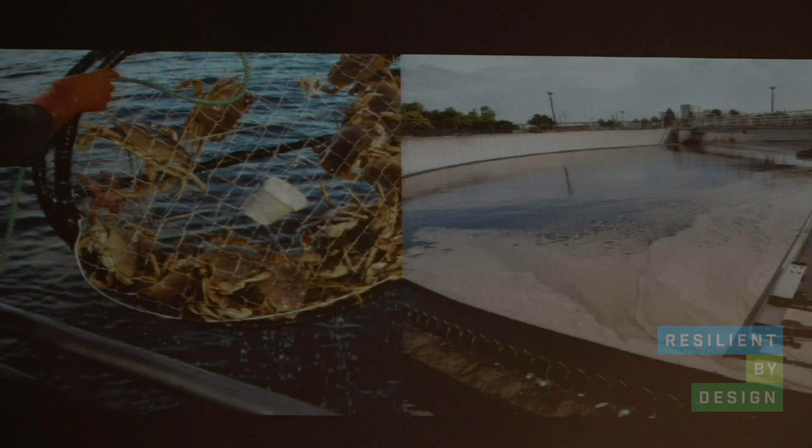The Baylands are incredible. They host our food sources. They treat our waste. They are these vast, almost incomprehensible places in terms of their scale, yet they hold these bundles of critical infrastructure at their shore: the ports, the dredge channels, the train lines, the highways. They also host species, threatened and endangered species, at different points in their life cycle. And while they appear passive, while they seem like these large passive expanses of green and brown and blue, they protect us and buffer and cushion the impacts of sea level rise and flooding.

Yet these Baylands, these resources, face slow and invisible risk. Henk is right, there is no immediate disaster that this region has encountered. The disaster is slow and will happen over time, but it will be disastrous if we do not act now. This is an urgent problem for people, in terms of the number of people, critical infrastructure including drinking water, transportation networks, energy networks that are at the Bayland interface, but it's also an issue for these ecosystems themselves.

This quote has been really inspirational for our work, from the Baylands Climate Change Report: that most of the marshes are projected to be damaged or destroyed by 2100 unless we intervene now. So while there is no major disaster, this is the major disaster, and the Baylands are the infrastructure that our team proposes that we invest in today.

This risk is joint ecological and human, and we have focused on these issues in our definition of this question. We've looked at this mosaic of ecosystems that really spans from the subtidal environs to mudflats to marshes, within this tidal range, the diked ponds, and then the vulnerable communities that exist at the edge.

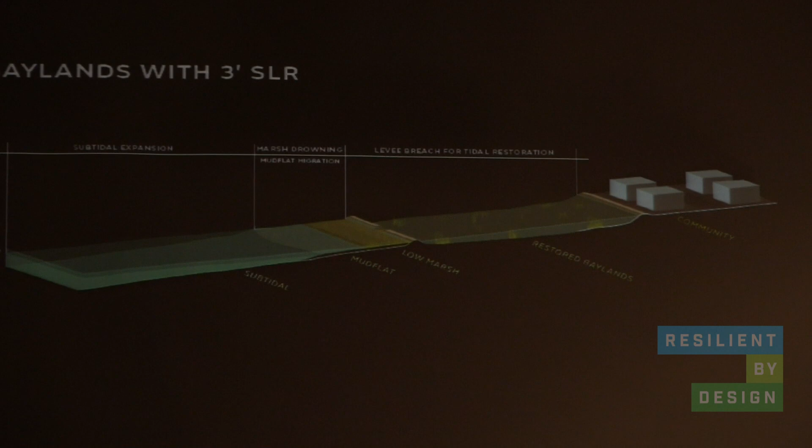The exciting thing about Baylands, the tidal Baylands, is that they have the ability to grow along with the threat of climate change if that happens at a slower rate. If we are faced with higher levels of sea level rise than we anticipate, and we have low sediment in the system, these ecosystems, these Baylands, will change over time. Mudflats will expand, marshes will shrink, and with higher rates of sea level rise, like 7 feet by 2100, these ecosystems will drown.

Vulnerable shoreline communities will be highly impacted. We will have deeper water at the shoreline, which will be damaging for populations along the edge and damaging for infrastructure along the edge, as well as large-scale ecological change.

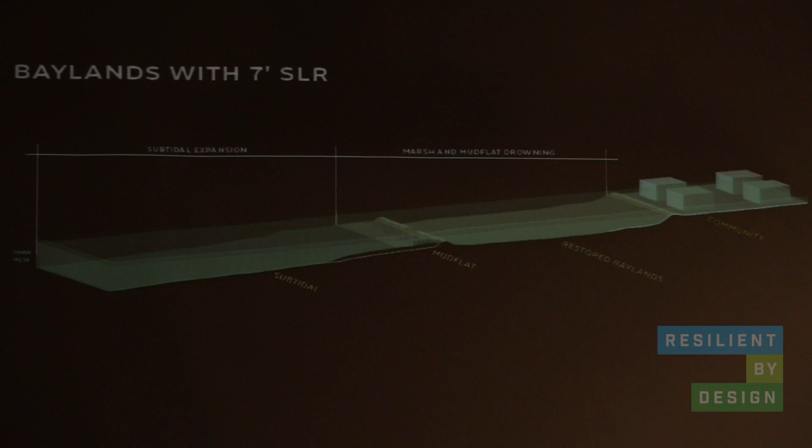Our team feels that what's at the core of this question, it's mud. It's this mucky substance at the bottom of the bay that's really core to this future ecological trajectory that we are already advancing along. We believe that sediment is the building block of resilience in the bay.

Many scientists have begun to look at these questions, and there are many reports beginning to show how this ecosystem, the bayland, the tidal bayland ecosystem, will transform over time if we are faced with high levels of sea level rise and low levels of sediment like we have today.

We know that sediment builds baylands. This is kind of an abstract concept to begin to think about. We have really modified how sediment flows through our systems, and we've modified this really differently over time.

Historically, sediment flowed downstream from tributaries local to the bay and from the large-scale rivers of the Sacramento and San Joaquin River. These conduits of sediment brought sediment to the bay and built the marshes that we know. However, we've really intervened in these systems.

In the era of the gold rush, we power washed the hillsides through hydraulic mining and actually increased the sediment loads that came down to the bay, building more marsh with this pulse of sediment that moved through.

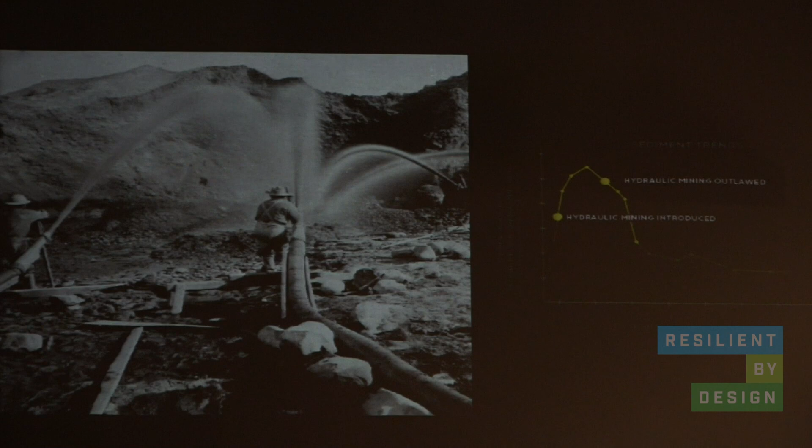But this pulse is over, and now we face a totally different condition, which is that we have sediment trapped upstream. We have invested in a huge way in infrastructure that stops the flow of sediment. We have dams, we have flood control channels, and this means that sediment is not making it to the bay, and that bayland interface is not able to keep up with the pace of climate change.

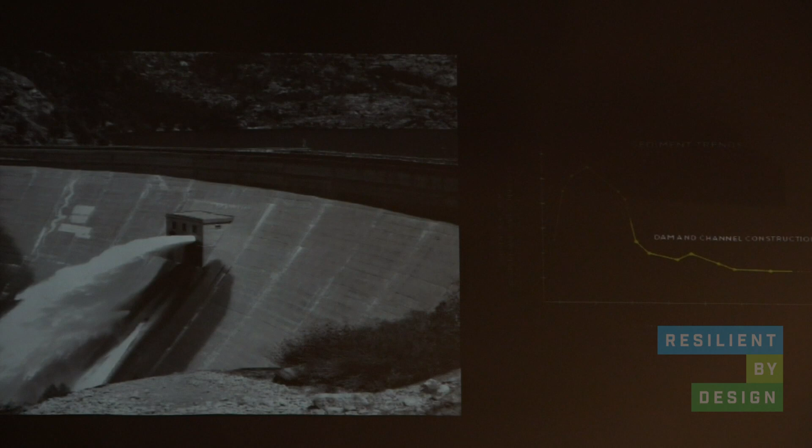So how much sediment is needed? This is a really difficult question. Our team struggled for weeks around this question trying to figure out what is going on. While we did a lot of calculations and charts, we ultimately just decided to use the best science that was available out there, which is the work of the San Francisco Estuary Institute.

This is some of the work that's being shown at the Estuary Conference a couple weeks ago. It shows this chart of how much sediment might be needed just to sustain the existing tidal baylands that we have today with 3.5 feet of sea level rise and a low sediment supply. What's shown on the right is what's coming in from local tributaries and the delta, and what's shown on the left is how much might be needed over time.

This is a really variable number. Though this is informed by science, there's a huge number of uncertainties that we have to factor in. We might have a higher sediment supply in the future if we have catastrophic fires and erosion, but we also might have much greater needs for sediment if the sea levels rise faster than anticipated. And if we restore more tidal wetlands, these are more spaces that will need sediment in the future.

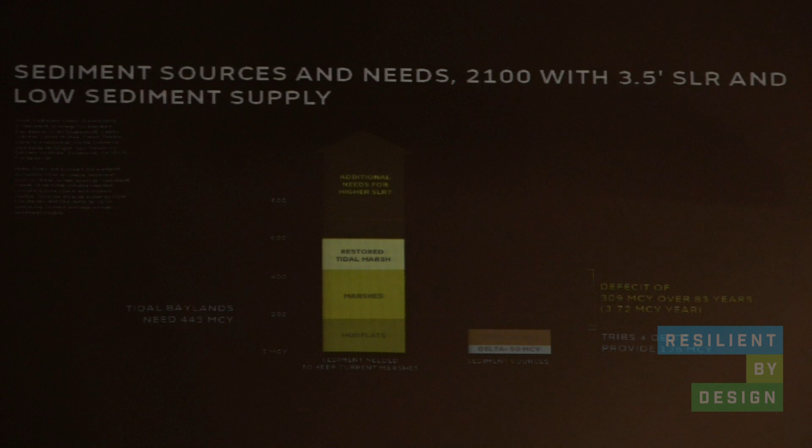So all of this work is very complicated and very interesting, but the big conclusion is that there is not enough mud to sustain the ecosystems that we know. So what are other sources? How can we think more creatively about this material? How can we think about tributaries, realign them to actually move more sediment downstream? Break up dams, harvest dams, think about using the sediment source in a different way.

How can we think about repurposing dredge material? Right now, 30% of all dredge material leaves the bay. It's treated as a waste product, and it is dumped offshore. And this is not due to a lack of care or a lack of intelligence around the system.

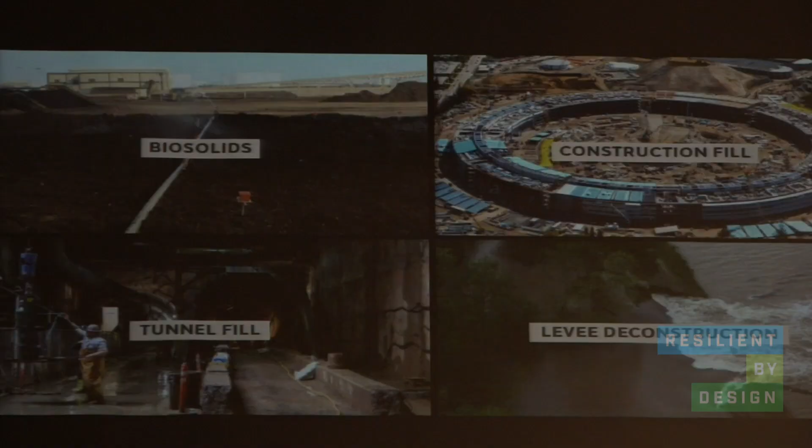We need to collaborate to make sure this doesn't happen, and find new funding mechanisms, new regulatory mechanisms, and new physical design techniques to keep the mud in the bay. We also need to consider new sources, totally unconventional sources like biosolids, tunnel fill, levee deconstruction.

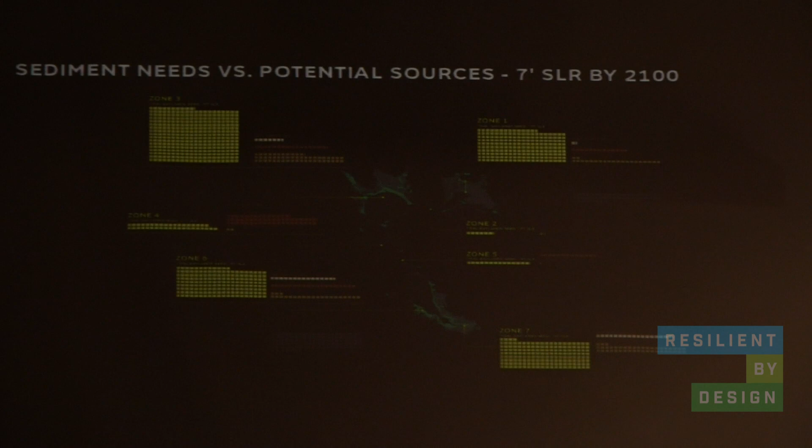So even if there was this huge effort to marshal all of these different sources and apply them in the bay, and have this giant mud management strategy to move stuff around, we still have a really big discrepancy between what the tidal baylands are projected to need today and what is available in the future. And this discrepancy just grows if we have higher rates of sea level rise.

So our team has come to the conclusion that the baylands will change, and they potentially will change dramatically, and we have to position ourselves now to truly address this. So what does the future look like? We are projecting a large-scale transition from marsh to mudflat to open water.

This is terrifying if you're an ecologist, I think, especially if you study coastal, wetland, and estuarine systems, because it would mean a complete transformation of this ecological fabric. But I think it also should be terrifying if you are a resident of the Bay Area, because this means we will have deeper water closer to our front doors. We will have a much more vulnerable system if our bayland infrastructure drowns over time.

This has different spatial impacts in different parts of the bay. In the North Bay, this mosaic, this transformation from marsh to mudflat to open water, has dramatic impacts on the communities that are at the tips of the tributaries. So you can kind of see in the red on these slides the impacted communities.

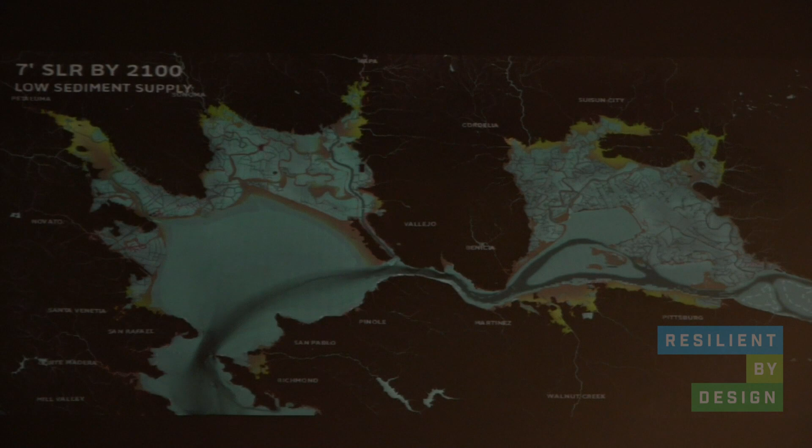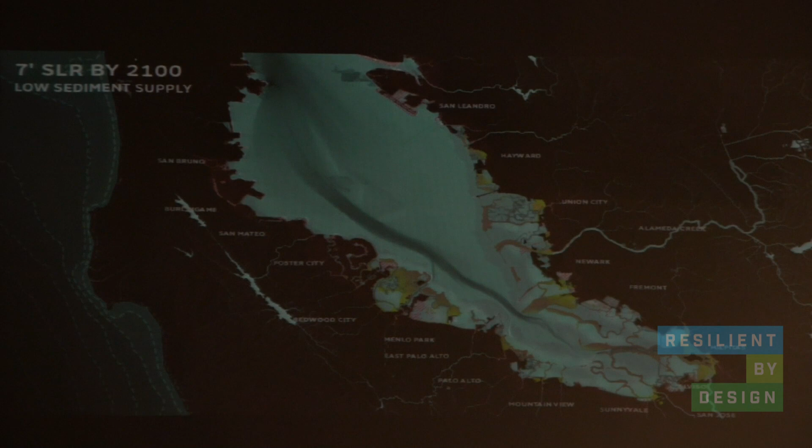But in the South Bay, we have massively developed in the floodplain, so it has an even more transformative impact. This bayland cushion, this amazing kind of mosaic of ecosystems that helps buffer the tidal range, is sinking, is drowning over time. And this network, this kind of swath or band of urban areas, will become much more vulnerable and exposed.

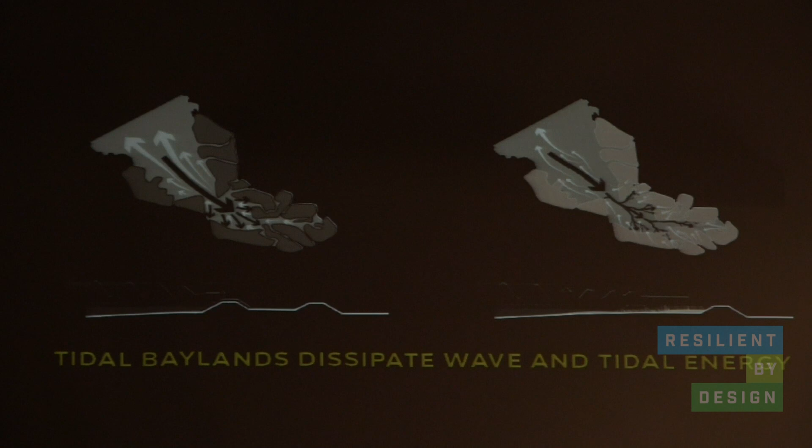So we think this is problematic. It's ecologically problematic. It's problematic for people. And we are proposing to really investigate and invest in the baylands ecosystems. And I think what's exciting about working in the Bay Area is that we think you have the capacity to do this.

There is this legacy of Bay activism and organizing around these ecological resources that's hugely inspiring to us coming from New York City. We see a lot more of it here, so that's a really exciting environment to be in. It has this legacy of organizing against bay filling at this very large scale.

These are really big problems. And so we do not propose any singular silver bullet solution. There is no silver bullet solution to this threat. We have a low sediment supply likely in the future. We know that sea level rise is exacerbating this. And our team is attempting to bend this curve.

We are attempting to change this trajectory through the strategies that we call public sediment. So these strategies, this is a constellation of approaches. This is not a singular piece of infrastructure or a singular move. This is a suite of strategies that are physical, about designing with mud, but they are also social. This is about making sediment public and making this resource valued, known, and recognized as part of our resilient infrastructure and part of the systems that we invest in the future.

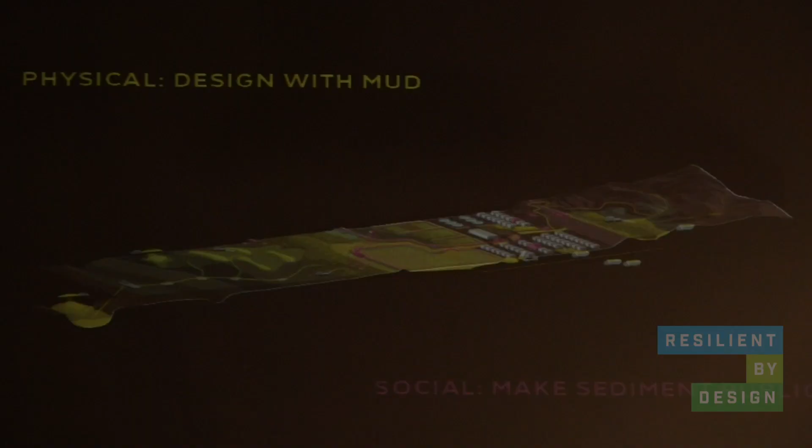And so we think it's incredibly critical to apply public sediment strategies across this longitudinal cross-section, from upland to lowland, to the interface to the bay edges. We propose to design with mud across this suite of places, and we propose to make sediment public within communities and connect them to the bay, connect them to this critical resource. This is public sediment. And so as we begin to kind of walk through these spaces, we begin to see what we are talking about when we're talking about designing it with mud. We're talking about harvesting dams.

We're talking about redesigning channels to move sediment through them, creating pools and places for sediment to gather. We're also talking about connecting communities along and across these resources to tributaries and to the bay through a series of mudrooms and sensing stations that make this very intangible topic visceral and real.

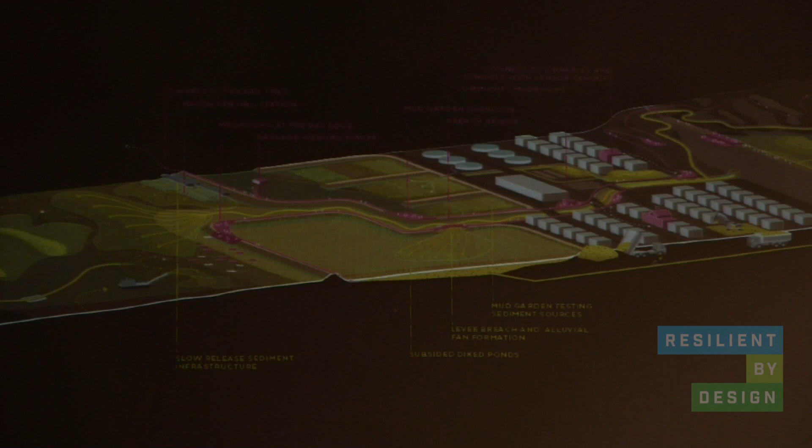We also hope to open and unlock the flows of these creeks and allow them to enter the baylands themselves, and have new strategies for designing and placing mud and other sources of sediment, like dredge material, in the bay in more passive ways that allow the sediment to move around with the currents.

This project and proposal is translated now into three design opportunities, and these design opportunities operate across three scales: a regional scale of project, a South Bay scale of project, and a tributary scale of project.

But this is not a master plan, and it's not three projects that are independent. These projects are activist in the way they're trying to suggest we have to think totally differently about these systemic resources. We have to change the system, we have to value ecosystems differently, as infrastructure, and we have to test these strategies in the most meaningful way possible.

So these are our three projects. The first we call Pilots for a Future Bay. This is our regional proposal, but really it's our smallest scale proposal, because we have identified a series of small scale pilot projects that we think can change the system.

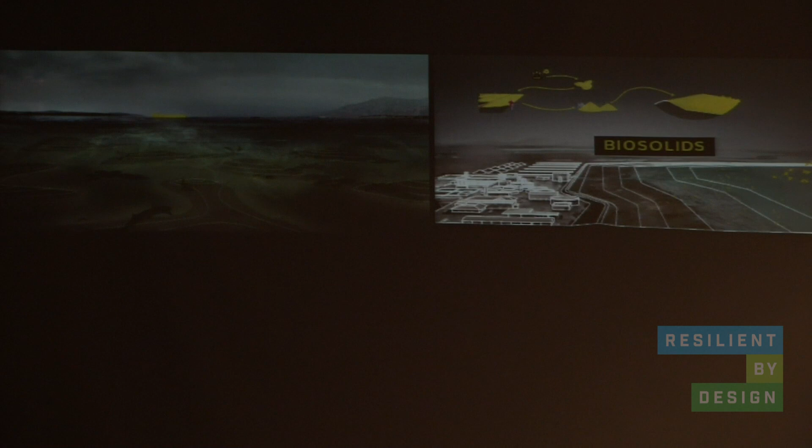These pilot projects are both physical and regulatory in nature. We think these questions really require collaboration and discussion between our regulatory partners and our physical design partners. So we propose underwater mud berms, we propose biosolids as a substrate for wetland building, we propose dam releases,

specifically at Searsville Dam as the pilot case study, and we propose building new habitat for risk reduction purposes, and challenging these questions around habitat conversion, because we know habitats will convert in the future.

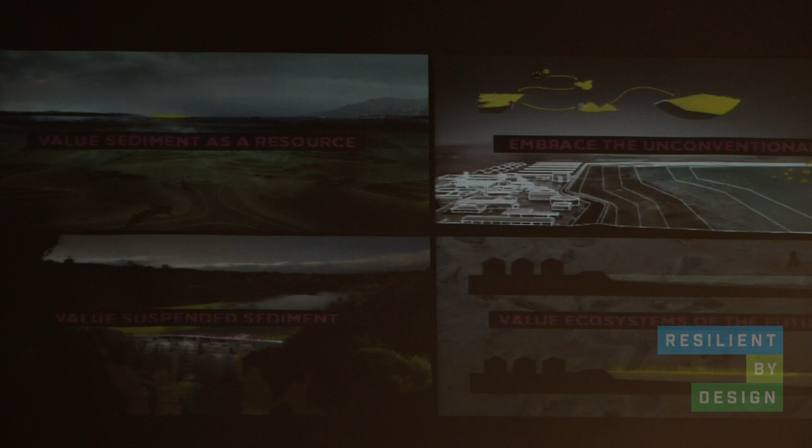So again, these are strategies and proposals that are pilot in nature. We would like to test them, but we would also like designers to engage in the regulatory conversations and the policy conversations that frame this work.

This is our bay, our mud, and all of these resources must stay in the bay, and we think this series of pilots could really help advance that question. We also think that while they can scale up and influence the region, they will be most influential if we work with students today to begin to develop them.

So as part of this project, we propose to work with middle and high school students to design the pilots, as they are ecosystem stewards of the future and will need to scale up public sediment strategies.

Our second project is called the Bay Cushion. We love this word cushion because it's very descriptive of that dissipating, buffering impact that the baylands have. We need to value ecosystems as protective infrastructure, not just as infrastructure for the salt marsh harvest mouse or the clapper rail, but as infrastructure for people.

The South Bay Salt Ponds is this incredible project that we were amazed with when we went to see this work, about the opening up of these big salt ponds to tidal exchange, growing and restoring marshes and mudflats of the future.

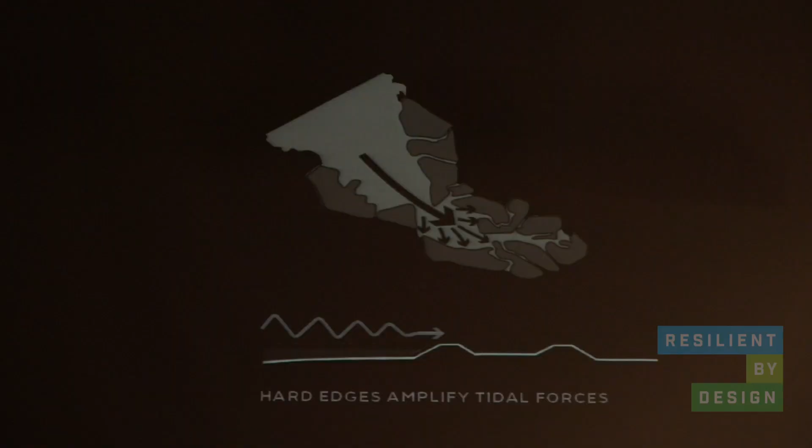But it is not currently valued or invested in as a piece of risk reduction infrastructure. Scientists are also beginning to look at this work. Mark Stacey did a modeling analysis of the South Bay salt ponds, and he did a version where the South Bay salt ponds had hard edges, and he found that this actually amplified the tidal extremes throughout the entire bay

with a sea level rise of about a meter, and he also found that in a scenario where he studied opening up these salt ponds to tidal exchange, the shallow water at the edge of the bay dissipated tidal force around the entire bay.

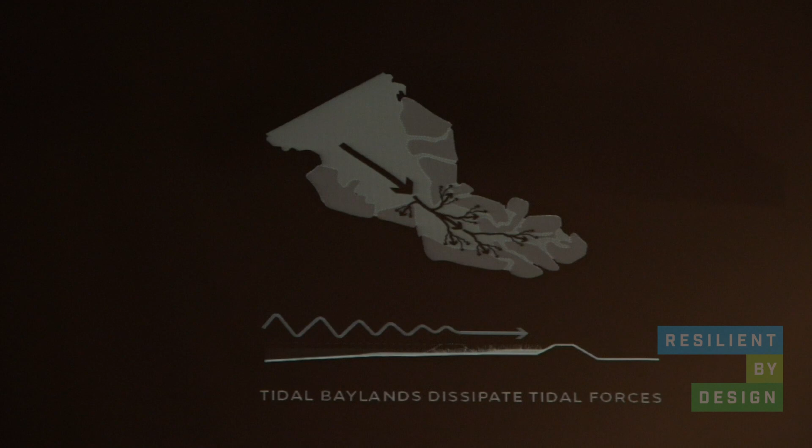So the South Bay is a very particular local condition that has bay-scale impact. That's incredibly interesting and valuable, and we're very excited about that potential. We think we should be investing in this restoration project as a piece of risk reduction infrastructure.

But we also know the South Bay, just like all other edges of the bay, while it accretes more rapidly, also faces the same challenge of low sediment supply and sea level rise.

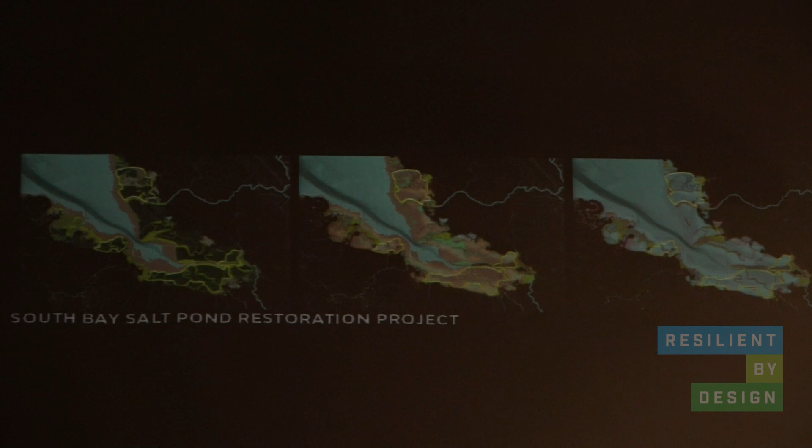So in this project, we propose to look at this and say, what can we do to prevent this trajectory? Because this is not just bad for habitat, this is bad for people living at the edges. What is the future of the bay cushion? How do we preserve the function of this bay cushion over time? And how do we do it with low sediment alternatives? How do we invest differently, with money and with sediment?

These are just some speculative proposals, but if we work on this project, we would like to model and study these different alternatives: an outer ring of marshes, a double ring of mudflats and marshes, and a large-scale migration alternative, looking at these potential futures, what risk reduction benefits they have, how they might be sustainable from a sediment supply standpoint, and how they might impact future habitat of the South Bay.

While this is a layer onto the adaptive management project that's already underway, we also think it's incredibly important to engage people in this question. While the South Bay Salt Pond is really viewed as a recreational resource, we know it is a cushion to the neighborhoods adjacent to the bay, and we must begin to engage people in these questions, to bring them closer to these systems, to understand and monitor and provide community tools for organizing around the impacts of climate change.

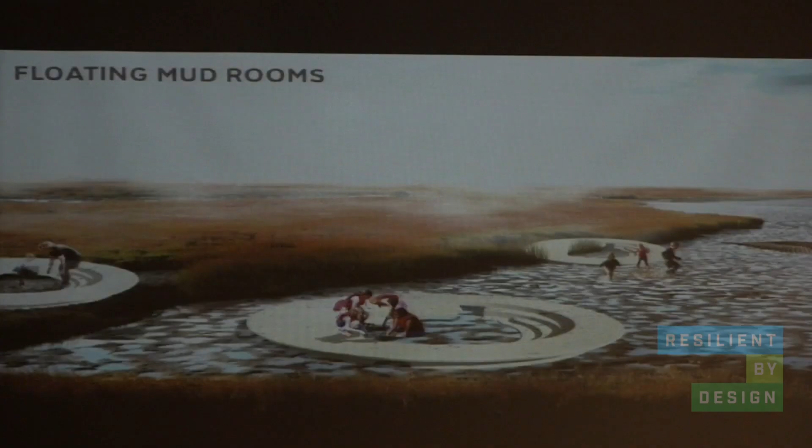A series of sensors spread throughout these neighborhoods like Alviso, which are right at the edge and already facing the impacts of groundwater and sea level rise today, but also creating spaces for more visceral interaction, mud rooms within the bay where people can go engage with this resource. So this is a large-scale ecological modeling proposal, but it is also a very fine-grained community capacity building and organizing tool for the South Bay.

Our third and last proposal is called Unlock Alameda Creek, and our whole team is super psyched about this project. We want to work in a big tributary. We think tributaries are key to this question. Alameda is the largest local tributary that feeds the bay, and we really feel like this is the most meaningful place that we could apply public sediment of the future today.

Tributaries are connective. They truly connect sediment to the baylands, which I think everyone understands now. But they also connect fish - there are species of fish that require the tributaries to gain access to their upstream spawning grounds. They also connect people; they can divide neighborhoods, but they also can connect people to one another and to the bay. But these tributaries have been designed almost exclusively for flood control - they've been sterilized, channelized, contained.

We must still protect for flooding. It's incredibly important that we don't expose any of these communities to future flood risk, but we must think about redesigning these tributaries to be much more ecologically and socially productive spaces.

So we propose to apply our suite of public sediment strategies to this tributary - to harvest the uplands, to unlock the channel, to place mud in the bay in a different way, but also connect people to this story, to apply this network of tributary paths, of mud rooms, of sensing stations, to connect along this and create a kind of critical fabric of infrastructure, of social infrastructure that leads to the bay.

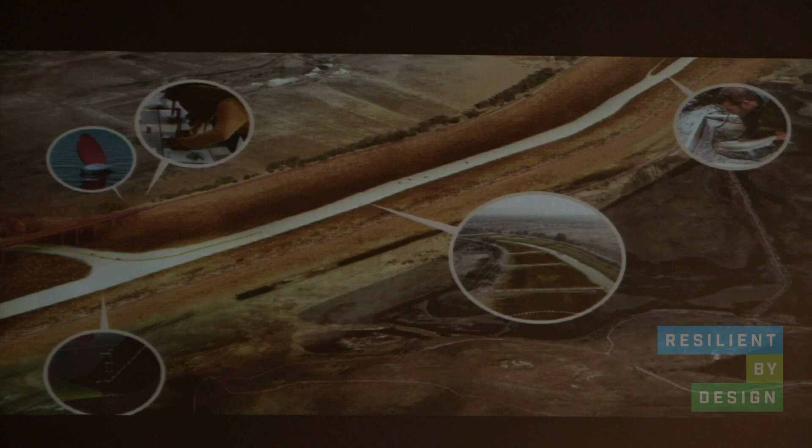So we think this is possible to do today here in Alameda Creek, to really unlock its physical, social, and sediment potential. Again, it's an incredibly scalar project and suite of ideas, but we think they will combine here in Alameda Creek in the form of dam harvesting, channel design, sensing stations, levee breaching, and also to truly create a space that connects its communities with the bay, with these larger stories about how mud actually creates this bayland, these protective cushions for the region, and will scale up over time.

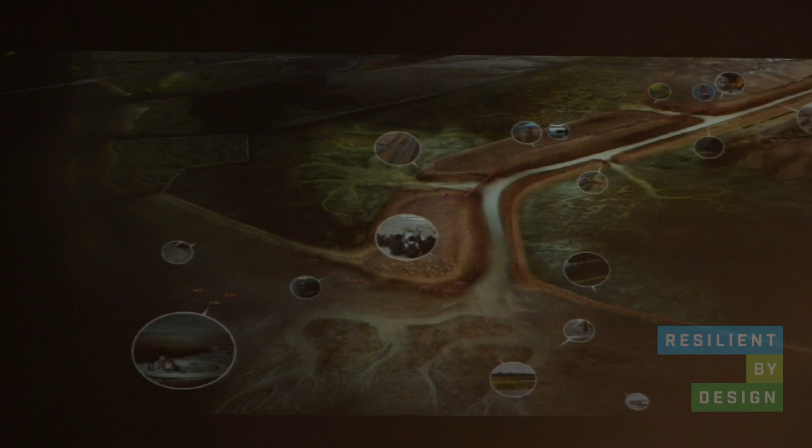So we're incredibly excited about this Alameda Creek project and process, but also excited because we think it's replicable - highly replicable to all the other tributaries that feed the bay and help promote living infrastructure of the future.

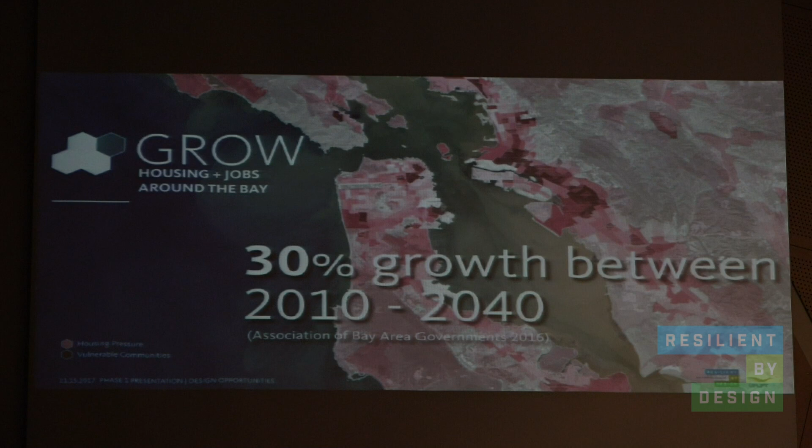If we think about it, there's 30% growth happening between 2010 and 2040 in the Bay Area. So how do we think about the growth aspect?

When we think about Trans-Bay corridors, the study that's been done right now suggests there's 152% capacity in 2040. So how do we think about moving goods and people?

And then there's really only 20% of the Bay shoreline that's accessible. So how do we engage that? Each of these systems doesn't run independently, and when we think about resilience, we have to make sure we think about all these four things together.

Given the complexity and the gravity of this challenge, our team approached the research phase eager to listen and learn from the regional experts, the resilience experts, and the community leaders to find out what they had to teach us about resilience.

Looking back at the last 10 weeks or so of our process, it wasn't surprising to realize that our most vital insights came from walking through neighborhoods and talking with community leaders, really being led by those who have dedicated their lives and careers to protecting communities in the Bay Area.

Besides our external outreach effort, our team also leaned heavily on our subject matter experts to conduct qualitative and quantitative research, and to synthesize a wealth of information into design workshops we conducted internally as a team. Together, it was our external outreach and internal workshops that really gave us the insights we built on for the design concepts that Ricky and Cecil will be talking about in a few minutes.

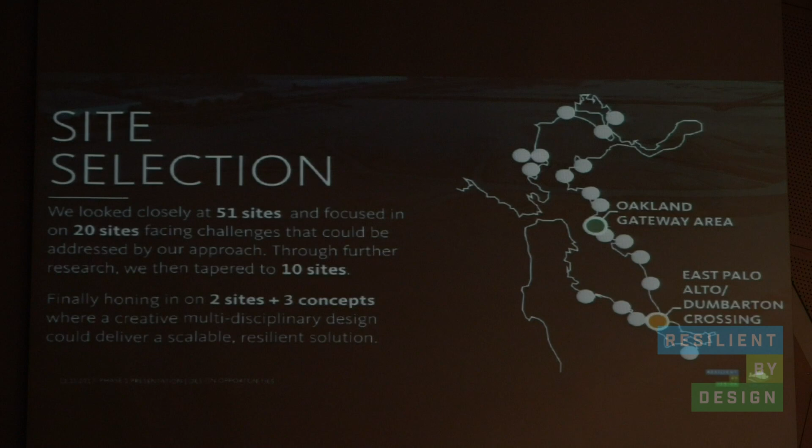And from those, we really found that 2 in particular—we looked north, south, east, and west—but we found that West Oakland and East Palo Alto were the two sites that really presented the greatest opportunities for our team to build resilience and to achieve our goals within the strategy that we outlined.

So in terms of the approach that we took to screening the different sites and through our site selection process, we didn't want to approach this in an arbitrary way and simply select sites based on gut feel or intuition. We wanted to take a more data-driven approach that was really informed by science.

So we began that by outlining these 6 key stressor categories, which we found to be the most prevalent in the Bay Area and also the most relevant to resilience. With these 6 key factors outlined, we were able then to subdivide those into very specific research areas. For example, within seismic risk, we looked at liquefaction potential around the bay and identified sites that were most vulnerable to that hazard.

Within equity, for example, we looked at the spatial distribution of gentrification and displacement risks, and we looked at those throughout all of the sites within the bay. And down the list we went until we had data that really informed our selection process and allowed us to compare sites side by side.

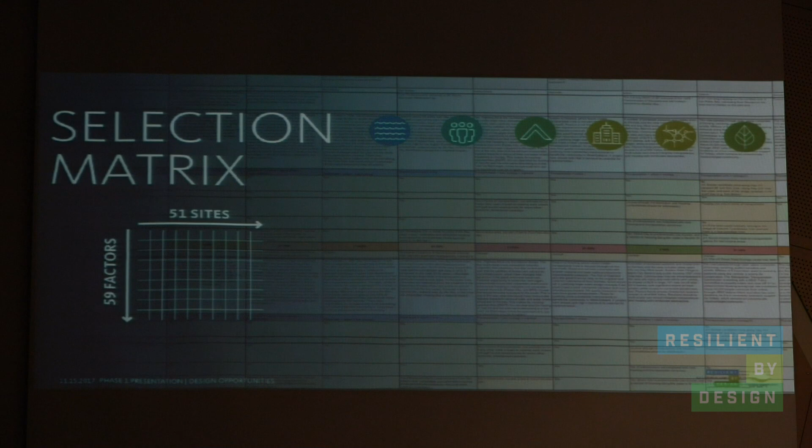So with these 6 key stressor categories identified and looking at these across our 4 strategic goals, our team developed a screening matrix that had over 59 factors and over 51 sites. And really this matrix provided a tool to our team to allow us to evaluate sites in a more objective way.

Looking at all of the sites and all of the factors that we took into account, from flooding to housing to mobility to ecology, again, we came back to 2 sites in particular, West Oakland and East Palo Alto, that really spoke to our team and presented the greatest opportunities for us to have high-level regional impacts from very localized interventions. From this research, we were also able to tentatively identify our intervention area and begin designing the concepts that Ricky and Cecil will be walking through.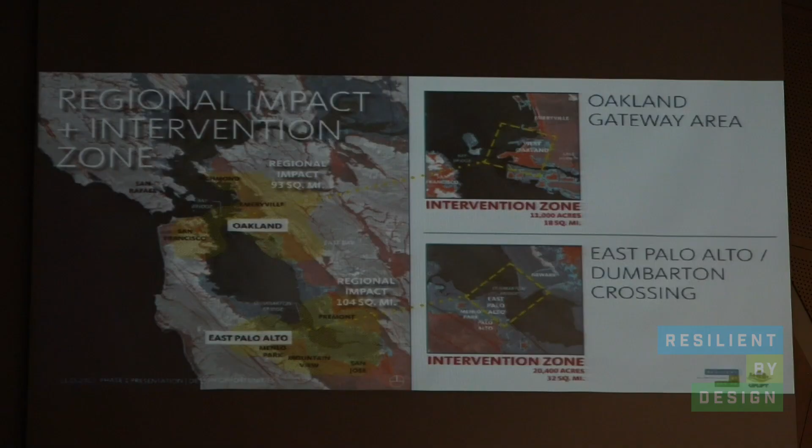So the first item we're going to be talking about is the Oakland Gateway area. And what's really interesting about this area is it's very rich in many ways, and all this infrastructure—it's a real 3-dimensional equation and solution where there's so many different factors that come together. One of the most important things is that Oakland already has this kind of vibrant character, its color, its richness to it.

So making sure that we actually understand what that is and work with that as a basic framework is really important. But again, with that, how do we create new experiences on top of that, and how do we connect these experiences together, and how do we work with the community to really figure that out?

So when we're balancing opportunities here, it's really about thinking about environmental justice, gentrification, and displacement in many cases. Can we actually build something adjacent to, for example, West Oakland, to increase opportunity, but also create something that actually benefits the community adjacent to it as well? And is there a way to manage displacement with that? And is there a way of really thinking about the risk of sea level rise and flooding in so many different ways and typologies?

So in terms of the constraints, again, sea level rise—we need to figure out what we do. There's actually 2 vulnerabilities in that area. What do we do with the East Bay MUD and the wastewater treatment plant? And how do we think about some of the investments that are actually in the liquefaction zones?

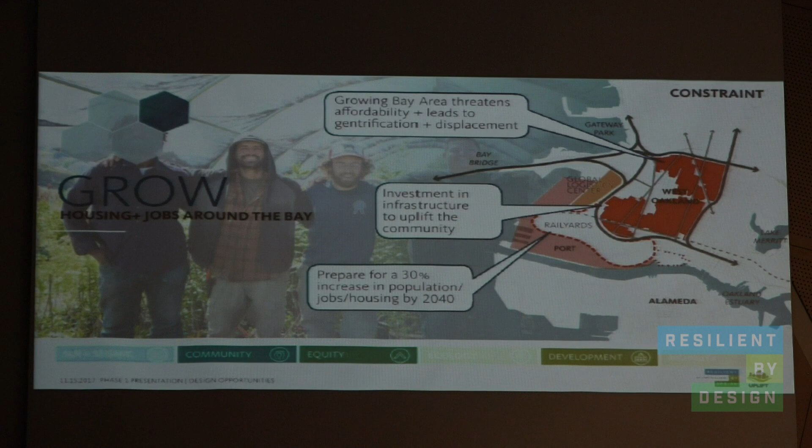We're thinking about growing the community because of growth. If we think about displacement, affordability of housing, gentrification, what do we do with that? Are there ways of preparing for this 30% rise in jobs and housing needs?

In terms of moving, again, infrastructure is a huge thing. Infrastructure actually could connect, but in many cases it does divide. So how do you actually create infrastructure that begins to provide value for its adjacencies?

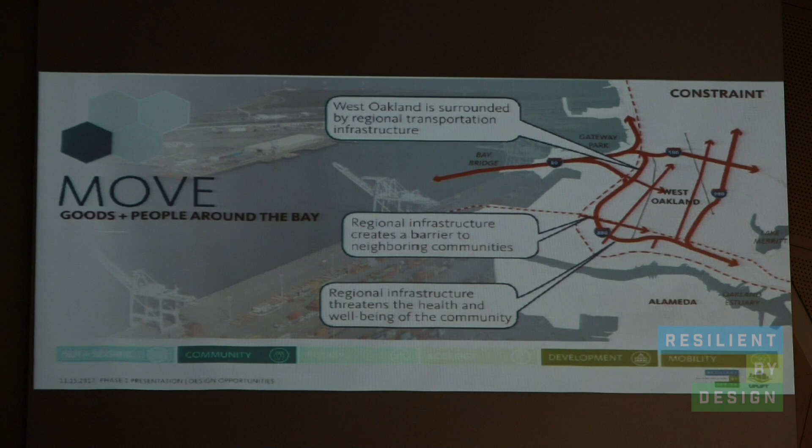Again, with mobility and infrastructure, are there ways of thinking about it from a health and wellness perspective? And if we want to engage, how do you actually get a community to connect back to the bay? We have an operating port, all this rail infrastructure, but how do we do that? And in many cases, here with Oakland and Alameda, the estuary divides up those communities. So how can we connect those things together? The first design opportunity and concept we talk about is bridging communities through uplift.

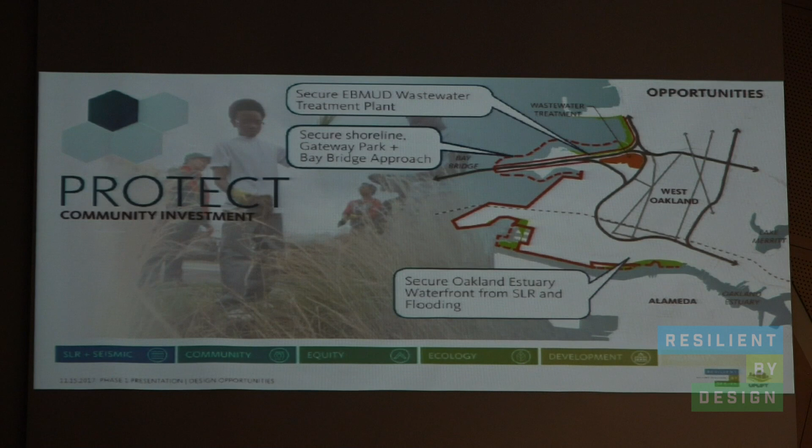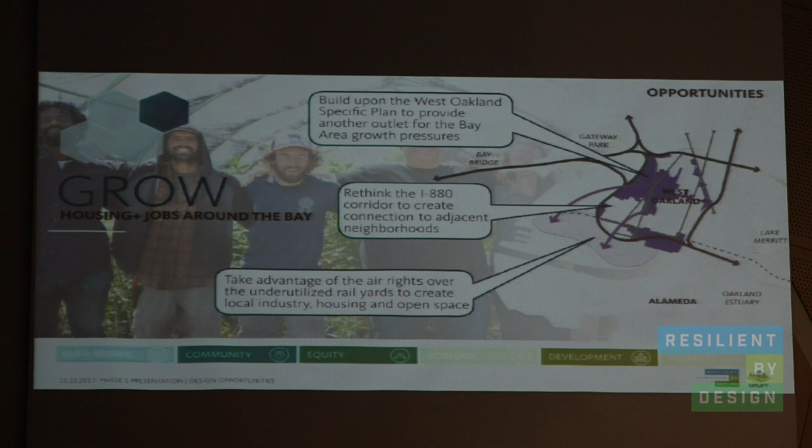The first thing we do is protect the edges, Gateway Park, also down on the southern side where the estuary is. In terms of growing, there are opportunities of creating and utilizing the underutilized rail areas to create a deck and a community above that. There are also opportunities to ease some of that growth pressure as well.

In terms of moving, can we actually rethink the I-880 corridor and see what we can do with that? Can we also reorganize some of the port logistics? Remember, the air pollution and all of those things are coming from there, but how do we mitigate some of that so there are advantages for the community? And then is there a way to create this kind of eco-connection between Alameda and Oakland?

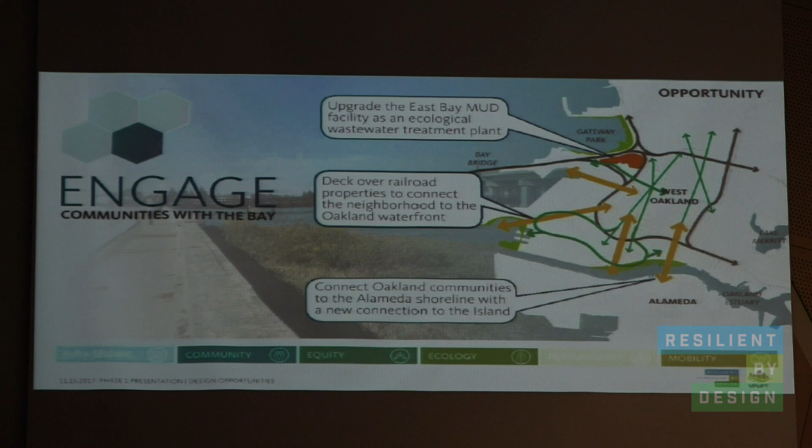In terms of engaging, again, if we create this new deck above the railway, is there a way of creating this new connection, bringing green and water closer to West Oakland, but also being able to get closer to the water from West Oakland as well? And is there a way of creating that connection to Alameda? So the strategies here are a synthesis in terms of our concepts of what we're thinking of doing.

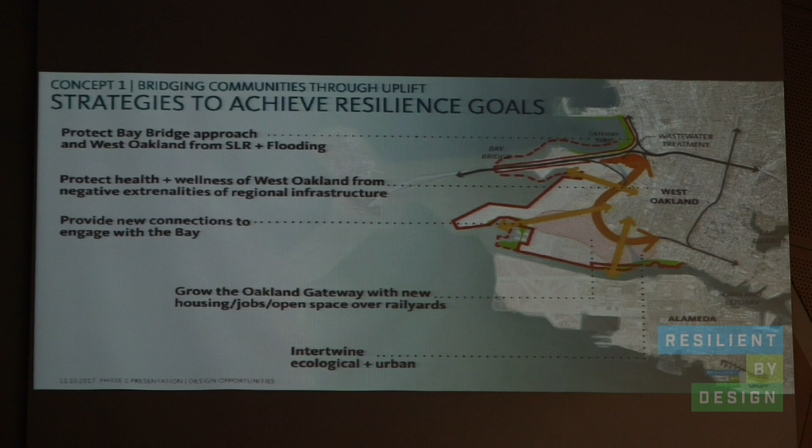It's really thinking about how do we intertwine the ecological and urban conditions, so it's not isolated, but how do we use that to our advantage? And we do that in order to protect, grow, engage, and move people.

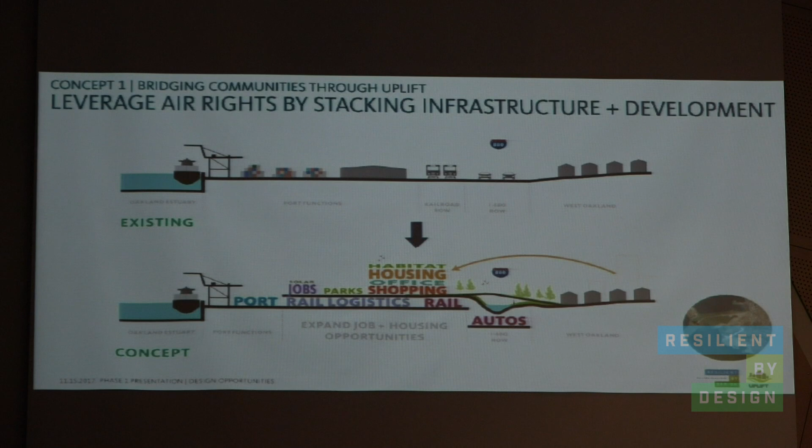So this is thinking about things three-dimensionally. You see the existing condition at the top, and then a section at the bottom. The section shows how you can have a dialogue between West Oakland and this new community in terms of new opportunities for managed development. You can see the rail logistics and the rail below, and also new opportunities for habitat, job growth, and new parks.

This is just another variation of that. And again, there's no single solution to this, right? So we need to work with the community to figure out what those things are going to be. Some of the stuff is obviously driven by policy and regulatory aspects, but thinking about the economic aspects as well will begin to change this around.

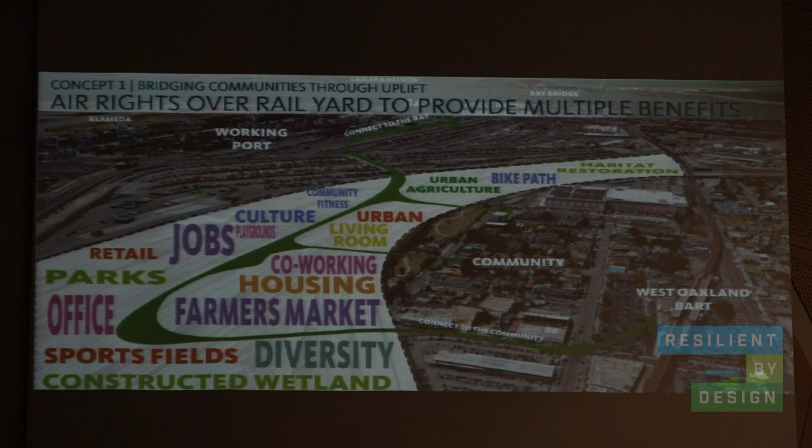This is a conceptual image of what we want to say. We want to really connect some of these communities to the bay, but really think about the operational aspects. The port needs to operate, but through clever design and working with the community, we'll be able to connect these connections that allow for new opportunities, like new jobs, new housing, farmers markets, opportunities for sports, constructed wetlands — really speaking to the culture and diversity of this new place.

We found the challenges and opportunities in this area so compelling and complex that we developed another concept for it, using some of the moves shown in our previous concept, but shifting our focus towards bringing water in and using it to connect communities from Gateway Park to Alameda. Our concept reimagines the regional infrastructure, which has disproportionately negatively impacted West Oakland, in particular the wastewater treatment plant, which will become increasingly vulnerable with sea level rise, more severe rain events, and increasing populations.

While sea level rise protection will happen primarily along the shoreline with both hard and soft protective infrastructure, we saw an opportunity to use the 880 right-of-way to address some of the current and impending issues by transforming the spaces under and adjacent to the highway with a green, spongy corridor. We can treat wastewater with wetlands, provide habitat and open space, provide a green buffer for highway air pollution, provide land that acts as a sponge during flooding events, and create a new and protected bay trail.

The corridor would link Gateway Park through West Oakland and down to Alameda, where we're proposing a new bridge to connect West Alameda to Oakland, providing a critical missing link. The right-of-way actually closely aligns with the historic shoreline, and by transforming this land, we're reconnecting two parts of the bay that were historically tied together.

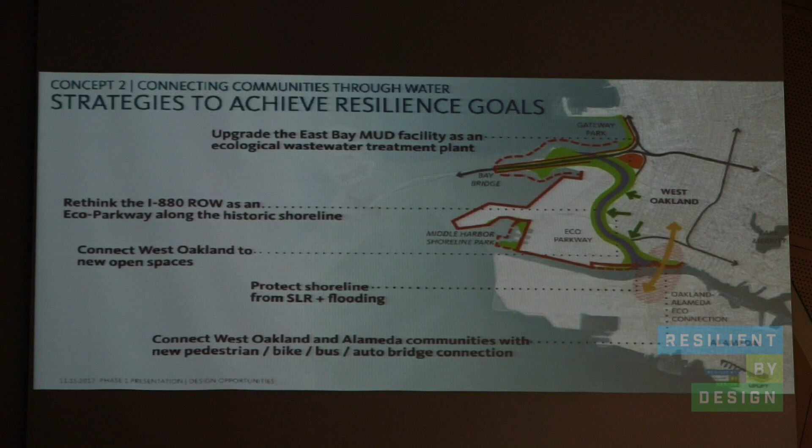In an area so cut off from the bay, we think it's critical to provide more ways and spaces of engaging with the bay, using water as cultural placemaking—understanding that resiliency isn't just about flood protection, but also about creating social cohesion. This likens to cities with canal networks, which were often built to control flooding but over time became iconic elements of the city, creating a sense of place and strengthening community.

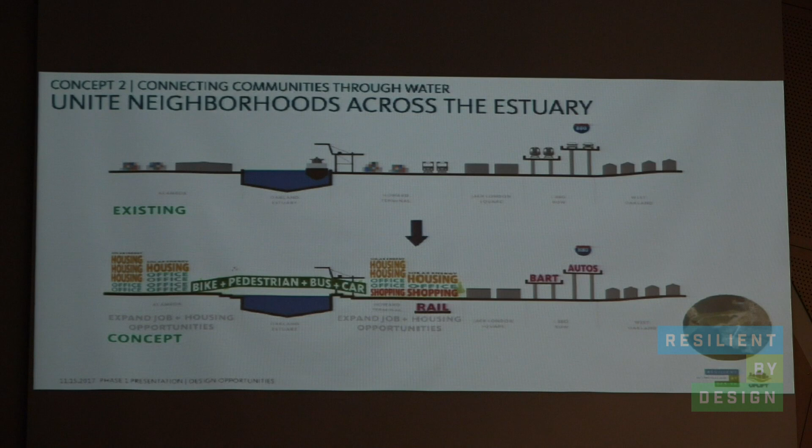At the southern end of our site, the Oakland estuary currently forms a barrier between Oakland and Alameda. By bridging the estuary, we can connect communities, activate both sides, and provide more access to the water and an evacuation route during disasters. By reconfiguring existing transportation arteries, including undergrounding the rail, we can create space for development, improve air quality, and reduce neighborhood traffic.

Further north towards the Bay Bridge, existing conditions show the breadth of land devoted to the rail and 880 corridor. Our concept transforms this land into a blue-green corridor. While we likely won't absorb all 63 million gallons of water currently treated by the wastewater plant daily, constructed wetlands within the corridor could treat some of that wastewater, allowing infiltration and improved water quality discharge to the bay. These wetlands could also act as habitat, providing a missing link between the Emeryville Crescent Marsh down to the Oakland Estuary and San Leandro Marsh. Adjacent uses could include recreation areas and other floodable programs so that during storm events, there's more land to absorb water.

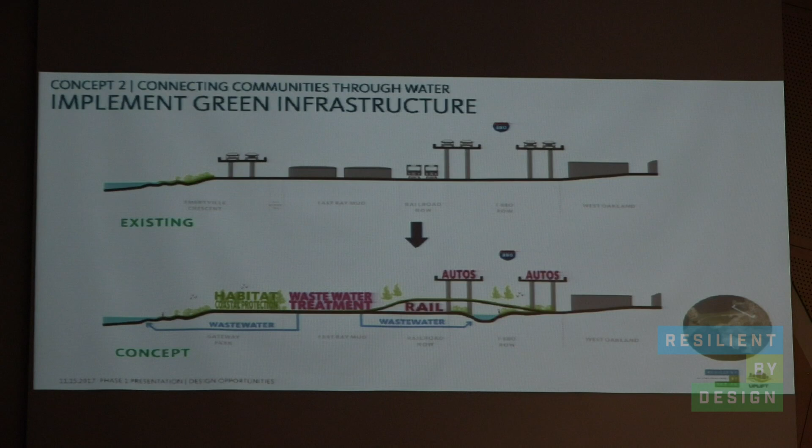The anchor of our blue-green corridor is the bridge to Alameda, which will integrate mixed-use development so people can work where they live, enhance the park system and transportation network through dedicated bus lanes, bike lanes, and open space, reduce traffic and commute times by providing a more direct route to the East Bay, and most importantly, connect two communities, creating a stronger, more resilient Oakland and Alameda.

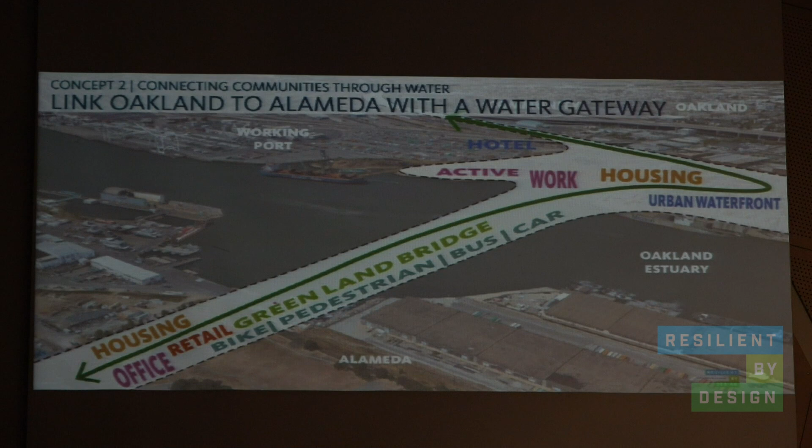So the third site we're going to talk about is East Palo Alto and the Dumbarton Bridge crossing area. I want to preface this by saying there are really complicated regulatory aspects down there. In terms of growth, we need to think about how cities evolve in the future, so we're looking more long-term, towards 2050.

East Palo Alto has amazing character and richness, so how do we keep that as a foundation while introducing new experiences? It's about how do you actually build on the bay and still maintain some of that ecological aspect—how do you do an intervention that may not have much impact on the bay itself but will improve other aspects? We need to protect some of the edges.

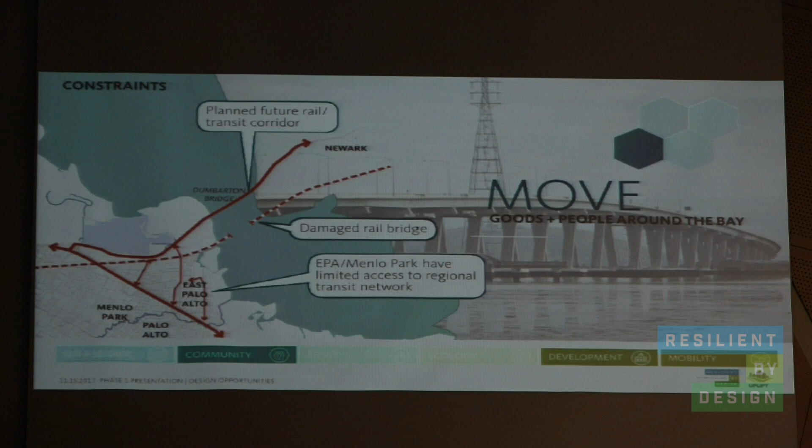Thinking about growth in those two communities—East Palo Alto and Menlo Park—think about affordability. How do we move the Dumbarton Bridge itself, or the rail corridor? How do we begin to connect those things together? And how do we engage with the water so that the water actually becomes a destination as well?

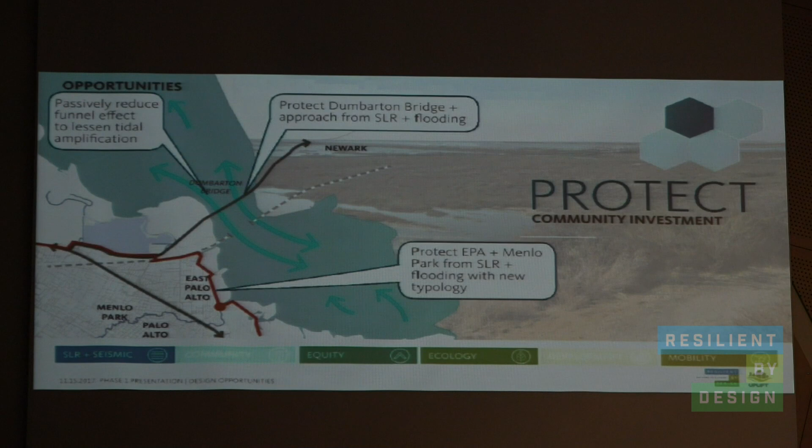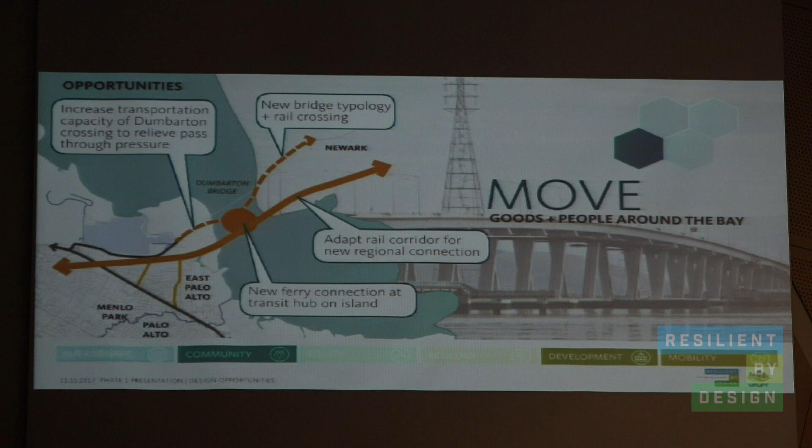So the third strategy we call habitat opportunities above and below—protecting the edges of EPA from sea level rise and flooding with a new typology. Is there a way to improve jobs and housing by thinking about the opportunity by the water, thinking about transportation in terms of new ferry connections, and a multifaceted bridge system that ties together these different modes of transportation.

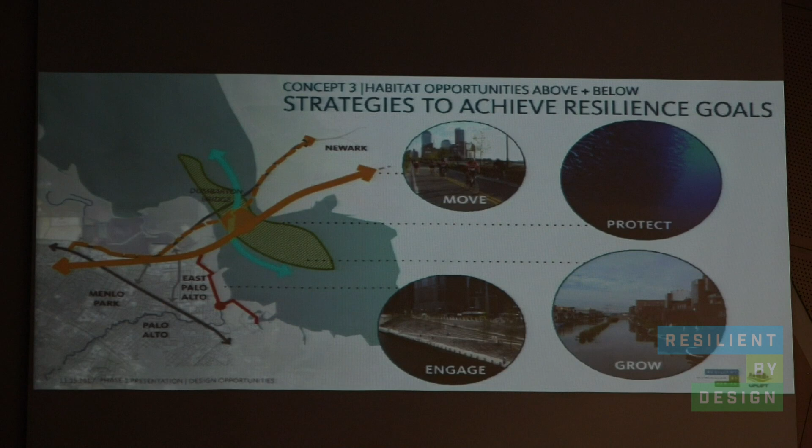And then how do we engage—this is really an opportunity zone—is there a way of creating this habitable intervention on the bay? These are some of the strategies we're thinking about that need to come together in terms of being able to move, protect, engage, and grow this area.

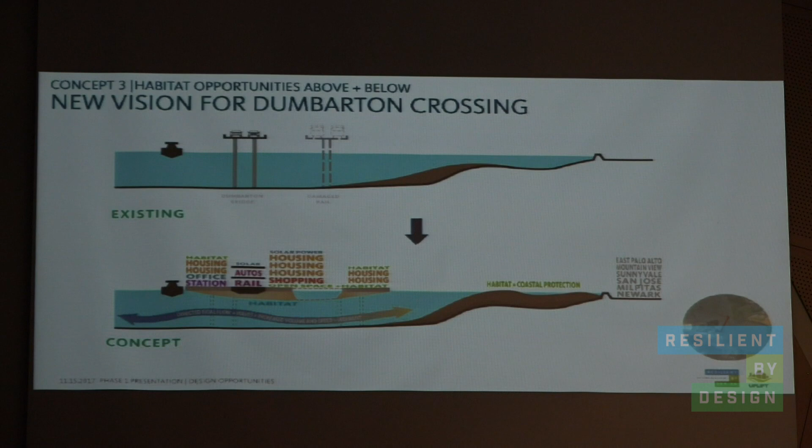So here's a section showing that kind of intervention actually on the bay. We're thinking about how you get back to some of the natural tidal flows, but is there something we can create that really thinks about managed displacement and other opportunities for habitat and housing? We call this conceptual image the bay as home and destination, as opposed to the bay just being a thoroughfare.

As you heard earlier from Ricky, the economic lens played a very important role, not just in identifying sites and interventions in terms of where they'll go, choosing the areas where they'll have the greatest impact, and communities around them which have been the most stressed in the Bay Area. But it also plays a really important role in our thinking around the types of interventions that will have the greatest long-lasting impacts. I think all of these interventions unlock tremendous economic value for the region, as well as for the communities around them.

I think the test of these strategies is going to be how we can capture that value and deploy it in a manner that doesn't just flow back to the infrastructure itself, but has long-lasting impacts in the community. That's going to be a critical piece of our thinking as we develop these solutions, so that these impacts stay in the community and the communities have the greatest benefit.

West Oakland and East Palo Alto are caught between two surges: rising sea level and rising housing prices. Community members legitimately fear that design solutions that help them become more resilient to climate change will exacerbate gentrification and squeeze them out.

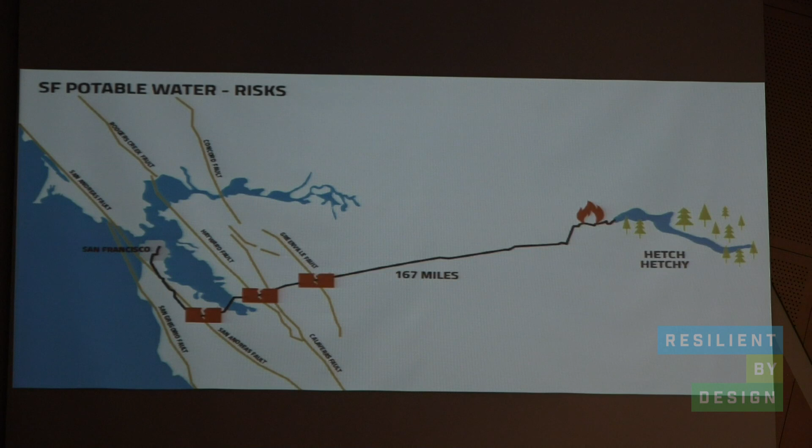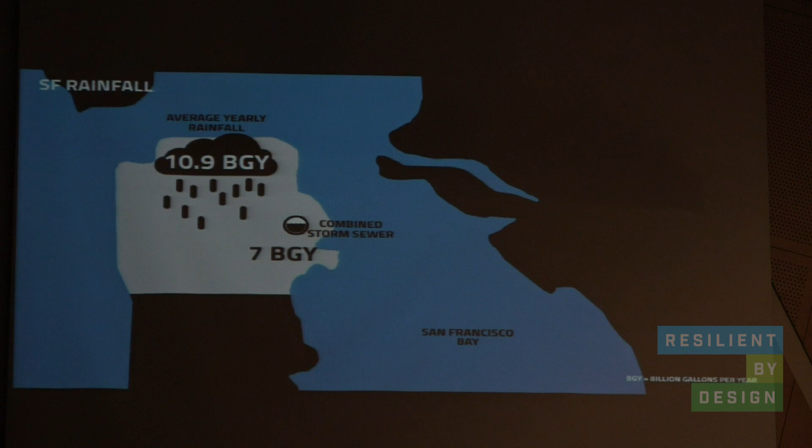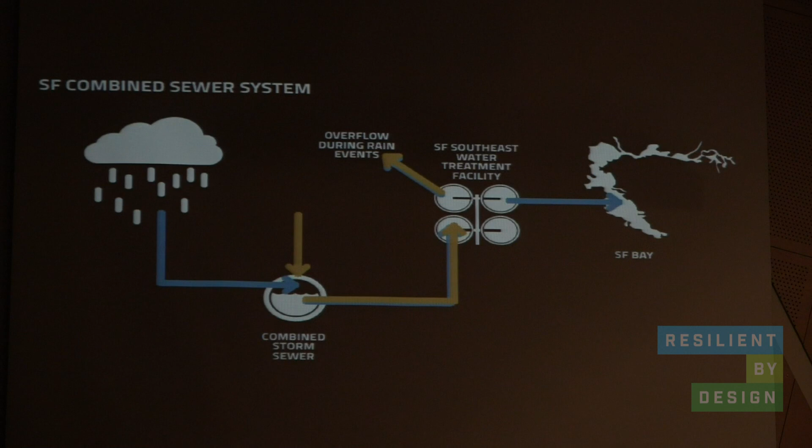The potable water of San Francisco comes from Hetch Hetchy, crossing 4 major fault lines. It's not only a threat for that, but also a threat from fire and drought—there are many issues with the water coming to San Francisco. San Francisco also gets almost 11 billion gallons of rainwater that could be captured, stored, and reused, but instead most of it goes down the drain, a combined sewage system. That means it gets polluted, and the system can't handle that amount of water, so it usually backflows up the drains and into homes.

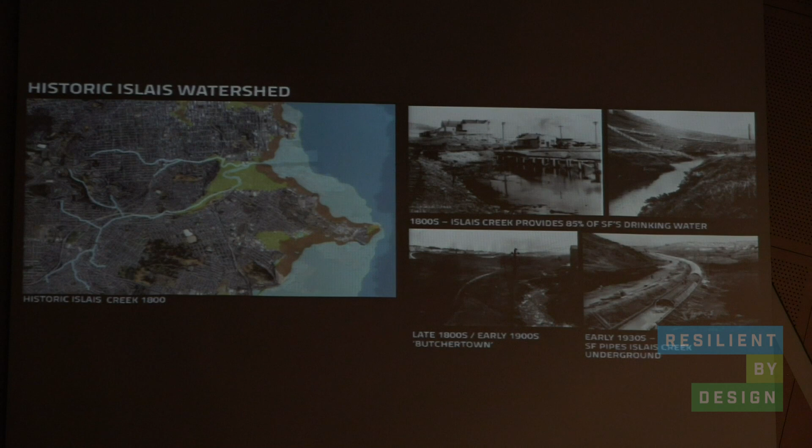So we like to think about what this watershed used to be like. Islais Creek used to run year-round and provided 85% of the water for San Francisco. Salmon used to swim up the stream, and the whole area was covered with cherry trees—that's where the name Islais comes from. But then it got culverted so the freeway could go above it.

The City of San Francisco Public Utilities Commission has already been doing a lot of work with the community, and has had an incredible process to identify potential solutions for this water problem and the flooding. Many ideas have come out of that, and we would like to incorporate those ideas and build on what's already been done in the community.

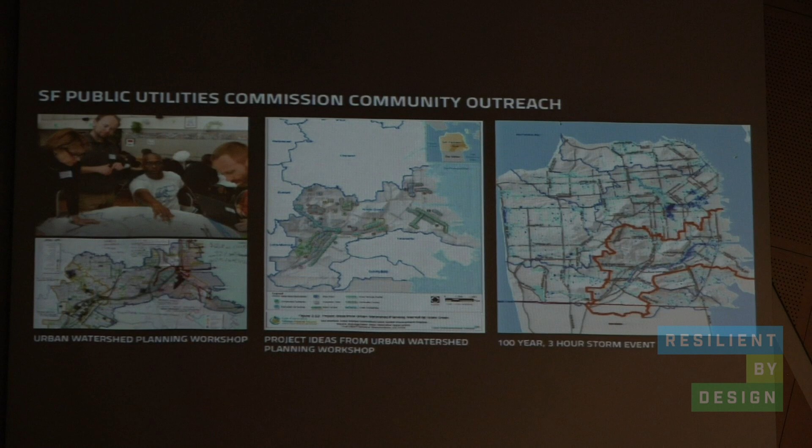However, this work was only looking at flooding from rain of a 100-year, 3-hour storm. So we know there are other issues that we need to look at. We need to look at drought, and we need to look at sea level rise.

So our idea is one of decentralization of the stormwater treatment. We would like to work with the city of San Francisco to figure out slow and small solutions that can work upstream, so that slowly we can start to reduce the amount of water going into that treatment facility, and divert and treat it upstream in smaller ways. We would do this working with local communities we already have an established connection with.

Right now, we find ourselves at this place where we have these hypothetical ideas of what could happen with the Resilient by Design Challenge. But the other step would be to identify funding mechanisms and identify all of the stakeholders within the area, so that we can work into a leadership training.

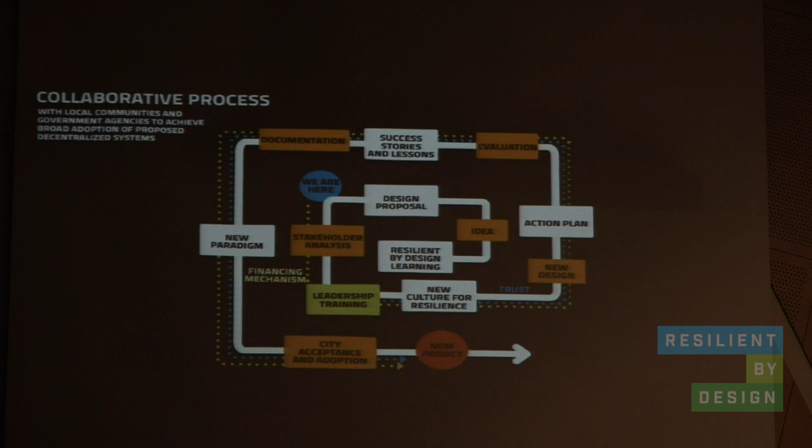That way we can identify all of the different concepts, new designs, and then implement those designs. Once they're implemented, we can look at the lessons learned, what's working, what's not working, and how we can implement it, and from that create a new paradigm. That new paradigm would then be a process that could be replicated and adopted by the city, so we can create new projects. So we have 3 scales of this.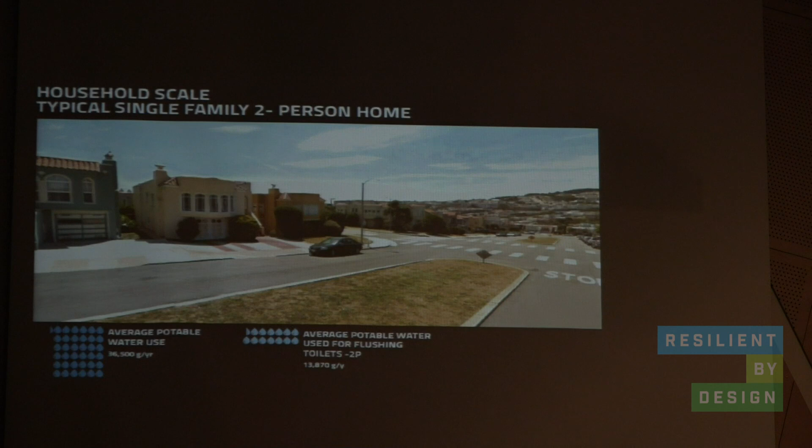At the household scale, we're looking at a typical single-family home in San Francisco. The potable water that comes into a typical home, about 1/3 of that goes down the toilet. So our idea at this home scale is to have composting toilets, gray water reuse, and rainwater catchment. This will save about 75% of the water at the home scale.

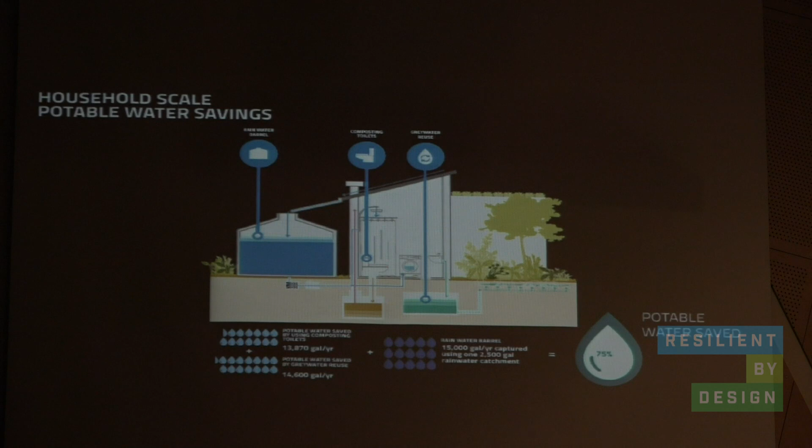We also want to implement other stormwater solutions that will allow water to permeate and less water to go down the drain. This will mean that about 25% of the water will be diverted from the treatment facility.

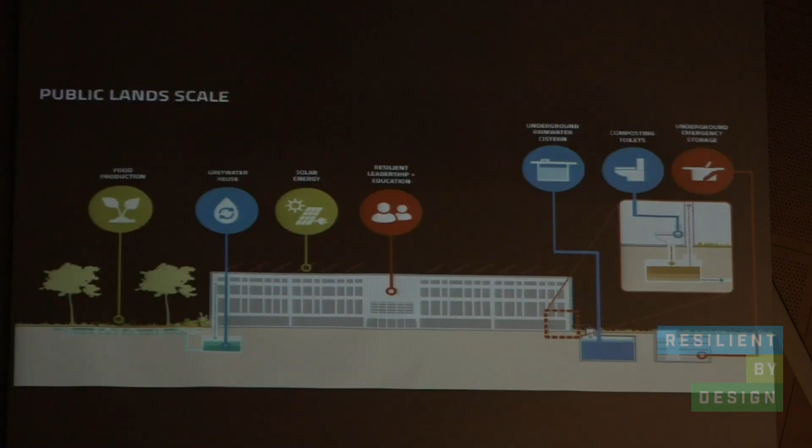At the public scale, we want to look at schools, because at school level we can also have a larger body of students. We would also look at composting toilets, because that could save about 60% of the water. And we also want to look at the potential of having large infrastructure for cisterns underground, where we can capture water and have it available for emergency use.

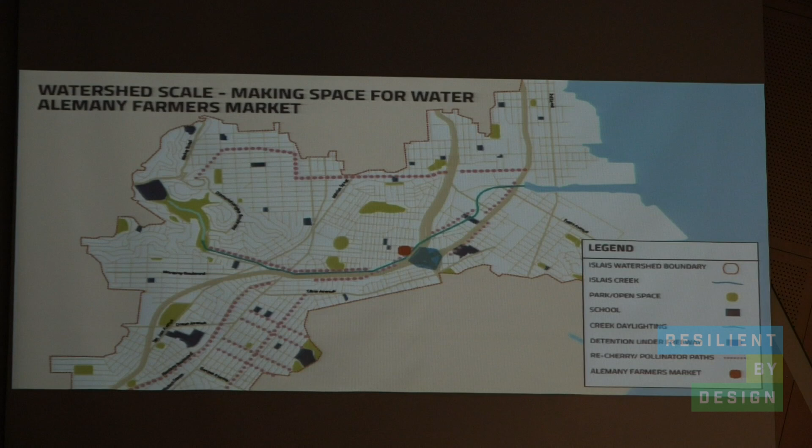At the watershed scale, we want to look at daylighting the creek to make space for water, and looking especially at the Alemany Farmers Market, which we think is a great place where we can provide a beautiful space, have access to nature, have access to that creek, and have a much better, vibrant space for communities to gather.

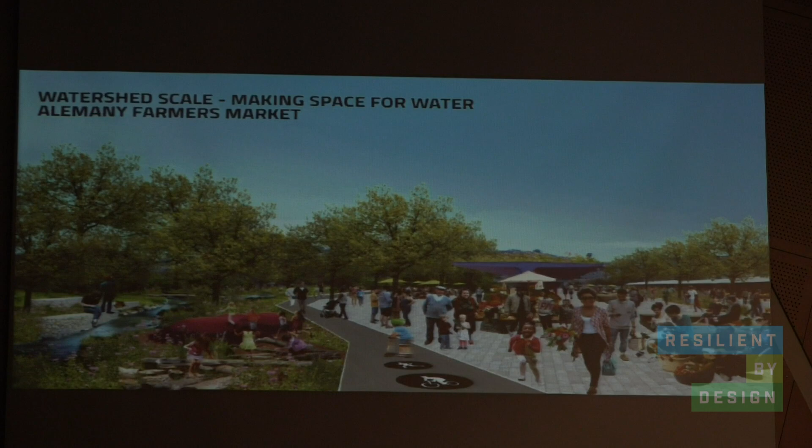We would also propose to have a flooding area underneath the freeway, allowing the water to flood and giving it more space. We could also collect it underneath the farmer's market. Eventually we want to create space for the water to go, and slowly transition the industry so that we can create space for wetlands in the area that's going to be flooded.

Hi, I'm Mark Lakeman with Communitecture.

So we have a very social, process-oriented team. Our third opportunity is located in the northern extent of the bay, in the San Pablo Bay, actually. We're very fortunate to have a number of team members able to tour together from site to site almost the entire time, so our site selection process was very immediate. For us, of course, we were learning along the way about the different vulnerabilities and the different states of the communities, their various planning efforts that were or were not underway, and their concerns. We were heartened by how many people were becoming aware, and we were also inspired by the amount of initiatives that had already been enacted as tests.

So that was brilliant. At the same time, we were looking for communities that weren't just vulnerable, but ones that were capable of getting started. That's a key component for us, being such a socially process-oriented group. We arrived on Mare Island, and it was immediately inspiring to us, especially because it's a direct connection to Vallejo,

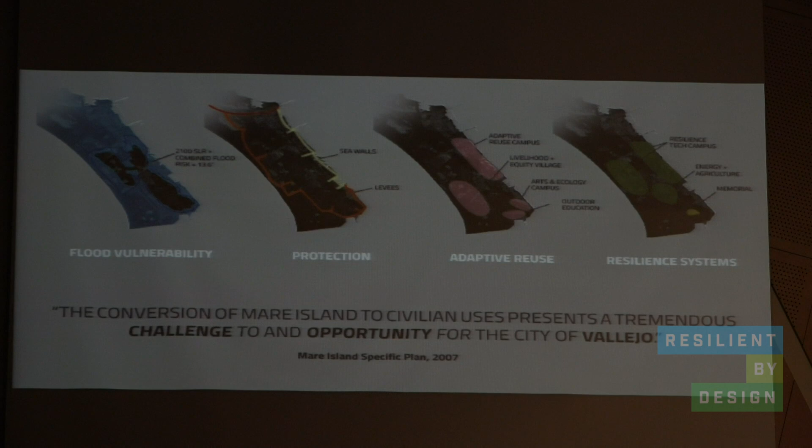the cemetery kind of inspired some new thinking in us about possibilities for the region that might become urgent and imminent. So looking at the different conditions here, of course the island is almost inundated with the combination of fluvial events, sea level rise, and storm conditions. Definitely it merits protection because there's a deep commitment to that infrastructure to preserve it and also repurpose it. So we identified areas of possible strategic adaptation and then thought about resilience projects to enact in those locations.

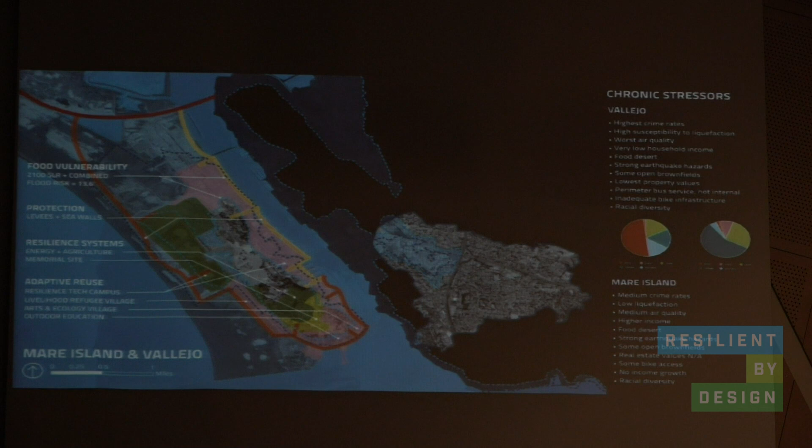The relationship of Mare Island to Vallejo is very direct. They're part of the same city, and at the same time, as it's a very special relationship, also clearly the withdrawal of the naval base has had a tremendous impact upon the economy and the social culture of Vallejo to great detrimental effect. One neighborhood in particular here, immediately adjacent, is a very activated community in many respects, but also very distressed on almost every kind of social, environmental, economic indicator, health-related.

Looking at the infrastructure around the perimeter especially, it's very much of an architectural problem of matching what we need to do with what resources we have. But also upland, there's wildlife and there's various different amenities. In fact, it's an archaeological Disneyland on this site.

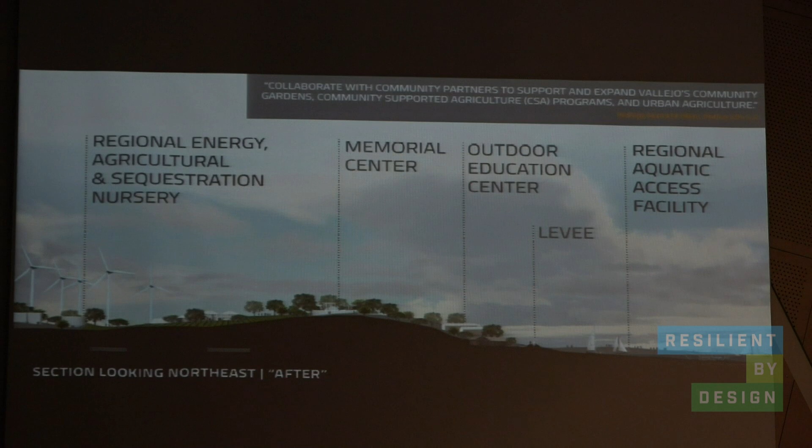So we started to try to sort of cluster these pieces and see how they might exist in relation. Looking at them vertically across the landscape, starting with the water's edge, we began by repurposing the causeway into a regional aquatic transportation sort of access linkage point, and then up from there, repurposing a cluster of architectural remnants into an outdoor education facility, moving up from there, an extension of the existing cemetery to become a regional memorial, which we'll show you in a second, and then from there, repurposing underutilized open space, controversially including a golf course, to become a place of energy generation and food production, powering as many as almost 2,000 homes and producing tons and tons of food, locally sourced food.

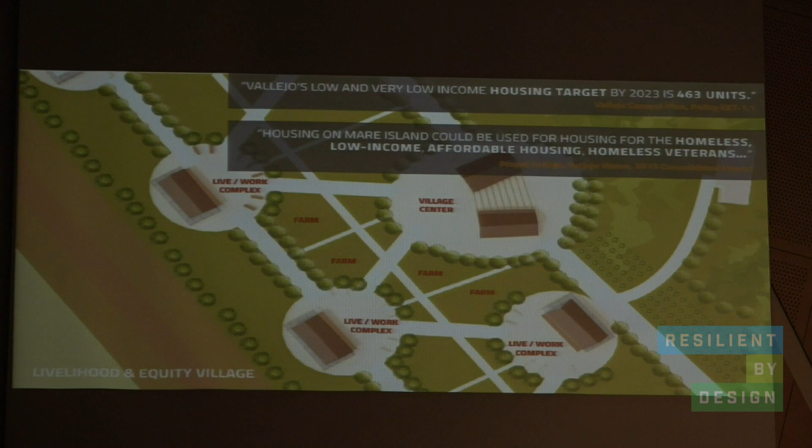So looking at our design opportunities on this site, to the west, we have about 150,000 square feet of buildings that are really in quite great shape, and we're proposing this as an equity and livelihood-oriented village for refugee and vulnerable populations to be able to come, earn a living wage, live together with their families while, we're hoping, we're projecting that we would be building resilience technologies for decentralized systems and at the same time growing food for the larger region as an economic basis, and this is what that might look like, just beginning with the existing architecture and then creating systems that connect things together.

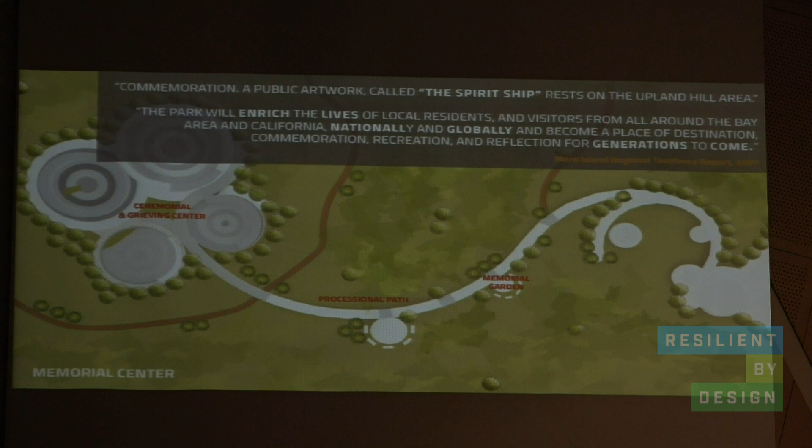And when we say equity, we mean a place for everyone to be able to have a voice and have a meaningful role. Up on the top of the island, a regional memorial center that brings people from the cemetery through a processional sort of contoured path with places along the way leading to an architecture of the sky, which really is about taking advantage of the views while we facilitate community gathering and many other sort of functions that we think are appropriate for a location like this.

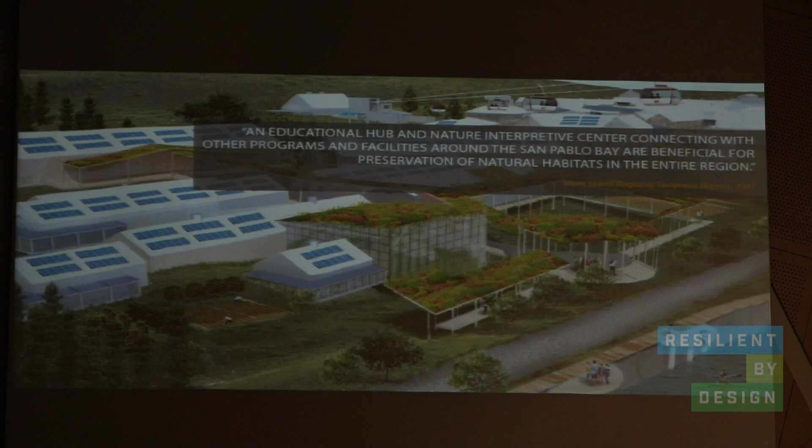And then finally, there's a cluster of remnant architecture at the southeast edge, which has already been identified with great enthusiasm as being a potential arts village. We think that it could also be linked with ecology so that it has an educational basis, certainly about production, exhibition, retail. Ultimately, though, the whole idea is to create a spectacular reinvention of the island that serves the entire region, all of Vallejo, of course, to revitalize its economy, provide a lot of housing, living wage jobs while we attract people from around the world. Thanks.